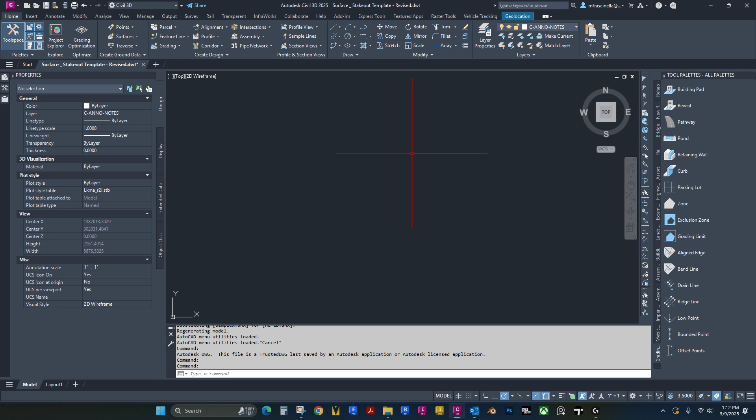Once it's open, we're going to do a save as, and we're going to save this as a drawing in our project. We'll just call it foundation and curb stakeout, and save.

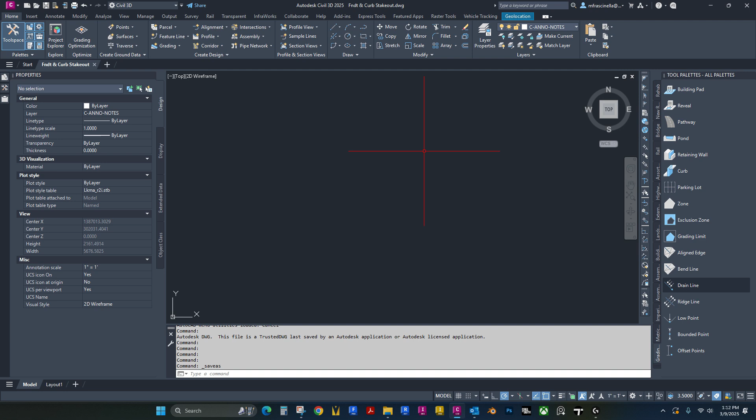The first thing we want to do is XREF our proposed layouts for what we're going to be staking out. So we're going to go to our XREF manager, hit the DWG, and go ahead and insert our layout.

Here's our building up here and our parking lot just below. Again, very simple, just a good thing for practice.

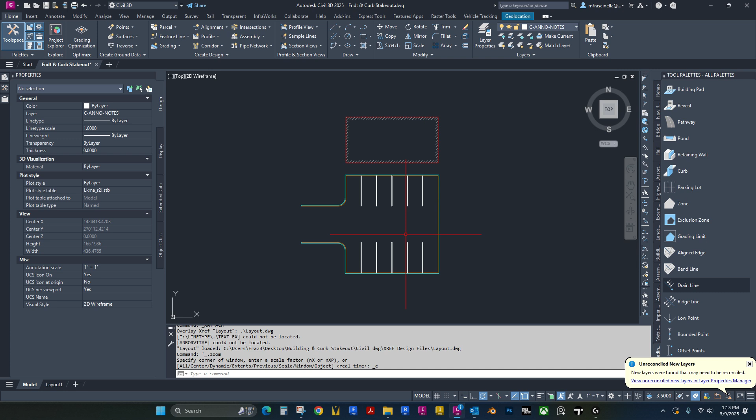Now that we have the layout in, the next thing we're going to do is put our surface in here. For the surface, we're not going to XREF it, we're going to data shortcut it. So we're going to go over to the Tool Space Manager, go down to where it says Data Shortcuts, expand surfaces, then right-click on Finished Grade, and select Create Reference.

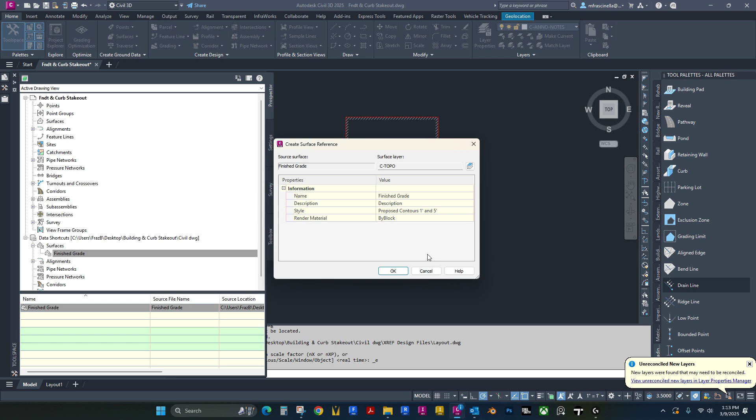And we're going to select the proposed contours 1 and 5 style, and hit OK. So now we have our surface in here, and we have our layout, so now we are ready to prepare the stakeout.

The first thing we're going to stake out is the building foundation. Since we'll assume that it has a full foundation, we're going to do a 15-foot offset. If this was a slab on grade, we could probably do more like a 10-foot offset, but for the sake of the example, we're going to do a 15-foot offset.

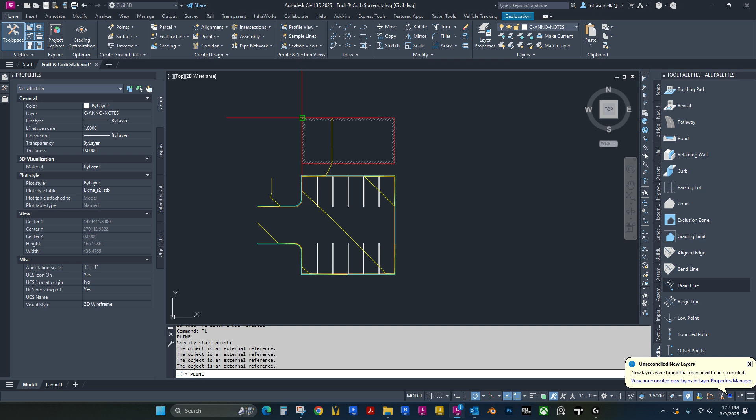The first thing I want to do is draw a polyline on each side of the building. So we'll go on the top, the side, bottom, and the other side.

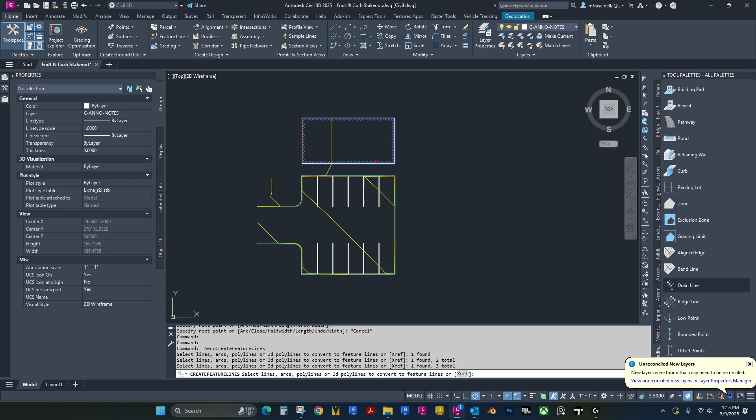Once we have the polylines around the building done, we're going to turn these into feature lines. To do that, we're going to go up in the top ribbon, click the drop down on feature line, and select create feature lines from objects. Then we're going to select the 4 polylines that we just drew, and right click.

We're going to keep it in site 1, that's fine. We'll put it on layer C-TOPO-FEAT, and then we're going to assign elevations and erase the existing entities.

Hit OK. Now we're going to get our elevations from the surface that we data shortcutted in, which is finished grade. We don't want to insert intermediate grade breakpoints — that inserts a point along the feature line anywhere there's a change in elevation, but all we want is a point at each corner. So we're going to turn that off, and then click OK.

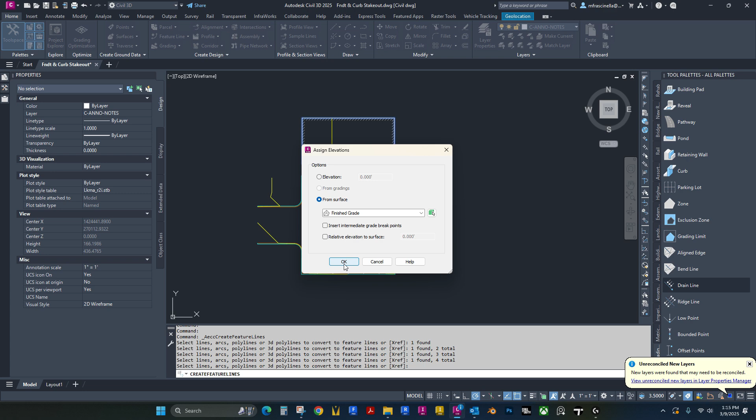Okay, so now you can see that these are feature lines with elevations. What we're going to want to do with each one of these lines is offset it the distance that we're going to be using for our stakeout, which in this example is 15 feet.

So we're going to select the feature line, go over into the ribbon where the edit geometry is, and use a command called stepped offset. Go ahead and click that. It's going to ask for the distance, so we'll go 15 feet. The side of the offset is going to be on the outside — we always want to offset the points on the outside of the foundation.

Elevation difference is going to be 0, because we want it to be the same elevation that we're going to be staking out. Then we're going to offset the other 3 walls the same exact way.

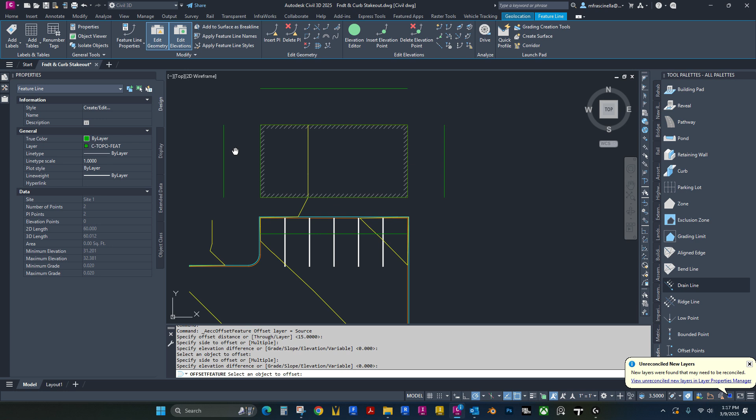Whoops, that didn't work, let's do that one more time. So we're going to select the feature line and do a stepped offset 15 feet to this side, and we'll offset this one to this side and enter. Okay, so now we have our 4 walls offset at 15 feet.

The next thing I want to do is create the points. So we're going to go up to the ribbon, and where it says point, we're going to hit that down arrow, and open up the point creation tools.

Go ahead and hit this down arrow, and that will expand the available options. So for the layer, we're just going to put this on V node.

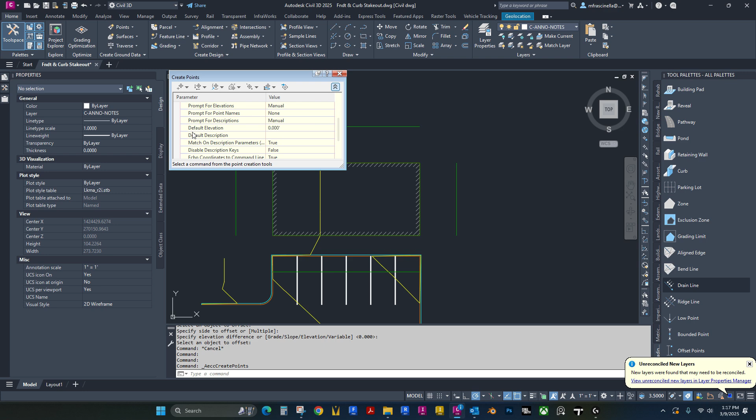Now, sometimes this won't expand all the way. You could hit the up arrow and then the down arrow again, and just drag it down. There we go.

All right, so let's go through the options. The elevations we're going to set to automatic, because we're actually going to be grabbing the elevation from the feature line itself. If you wanted to enter these manually for any reason, you can by selecting manual. But we're going to go for automatic because our feature line does have the elevation we want.

And the descriptions, we're also going to set that to automatic. And right here is where we want to enter our description. For this, we're going to do a 15-foot O period S period for offset. So now anytime we add a point and we have the description set to automatic, it's going to grab this default description, making it a little bit faster.

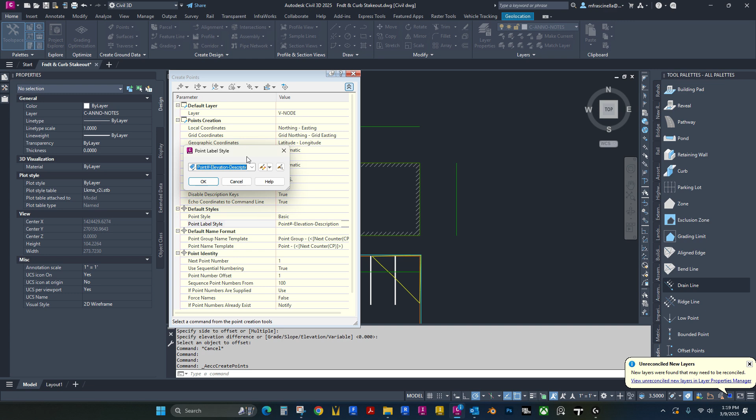For disable description keys, we're going to change that to true. By changing it to true, that enables us to change the point label style. So the style I'm going to be using is point number, elevation, description, dragged, because typically when I do a stakeout plan, unless it's a grid, I'm going to want to drag these points outward and move them around so they can display properly in my stakeout plan. Then once you have that selected, you're going to go ahead and click OK.

Okay, so the next thing we want to do is go through the point identities. So in order to not have any conflicts with existing survey points that may be inside the project already, I like to start my points from 10,000. So sequence numbers from 10,000. And then up here, next point number, that'll make sure that the first number we have out there is 10,000, and then it'll sequence the points from that number offset by 1. So it'll be 10,001, 10,002, and so on.

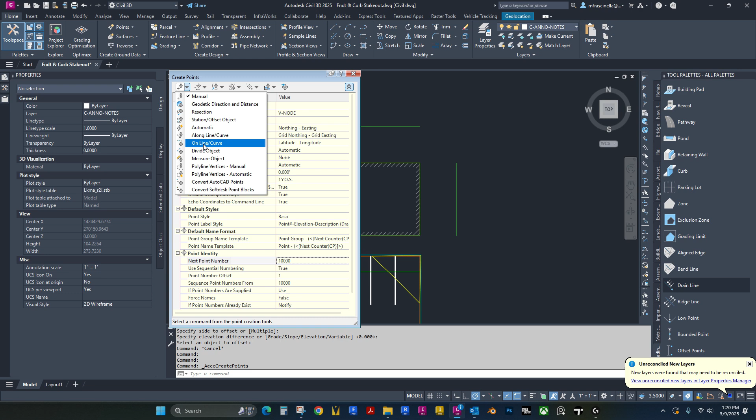Okay, so now that we have that all set up, we're going to hit this drop-down arrow, set our points, and do it on line/curve. Go ahead and click that. Now it's asking us to select an arc, line, polyline, lot line, or feature line. So we're going to select the feature lines that we just created, starting with the first one, select it, and then select the next one, the next one, and the next one.

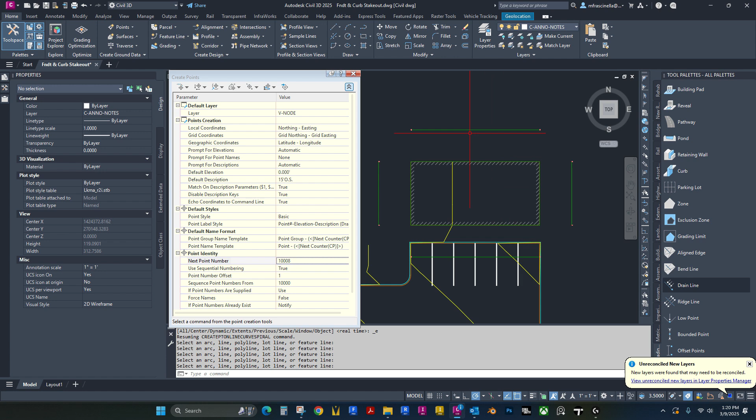Right click. All right, so the points are very small because we haven't changed our scale on the bottom. For this kind of drawing, probably a 10 scale would be fine, but you would really want to set it to whatever scale your drawing is going to be at. That's what you'd want to set these to. This way, when you move them around and drag them, you know how they'll display once you XREF it into your drawing. So you could see here, it did grab the elevation from the feature line.

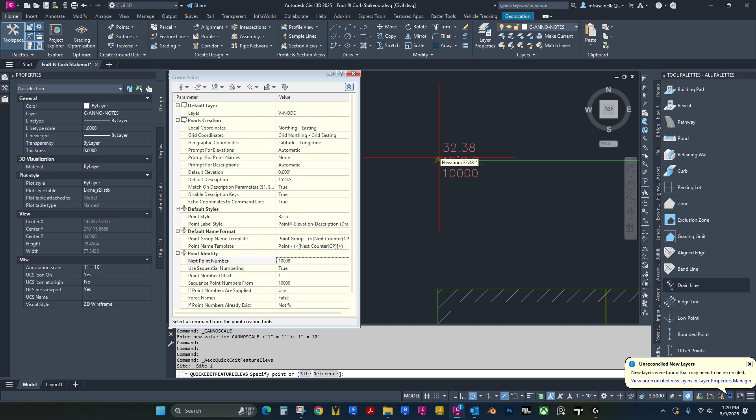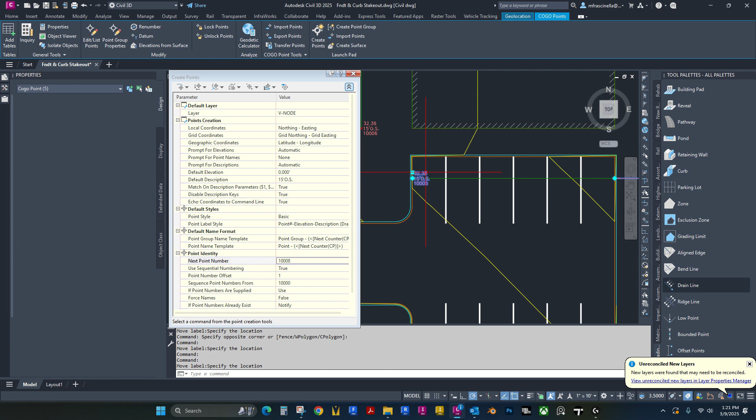We could double check that by just doing a quick elevation edit on the feature line. You can see right here, 32.381, and that's what we have on our point. So it's just a quick little check to make sure your points were reading right. And then we can drag this up, and we're going to go ahead and drag the other ones out of the way. You could also see that the numbers go by, increasing by 1 each time, which means it did everything correctly.

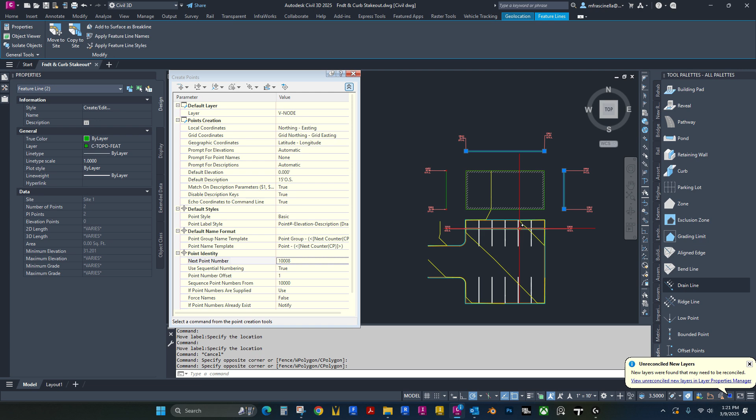Okay, so now that we have those points, we could go ahead and delete these feature lines because we no longer need them. And something else I like to do is add an arrow that points from the point to the corner in which it's staked out, or the feature it's staked out for. To do that, we're going to go up to the top menu, go to Insert, and we're going to insert the Stakeout arrow block.

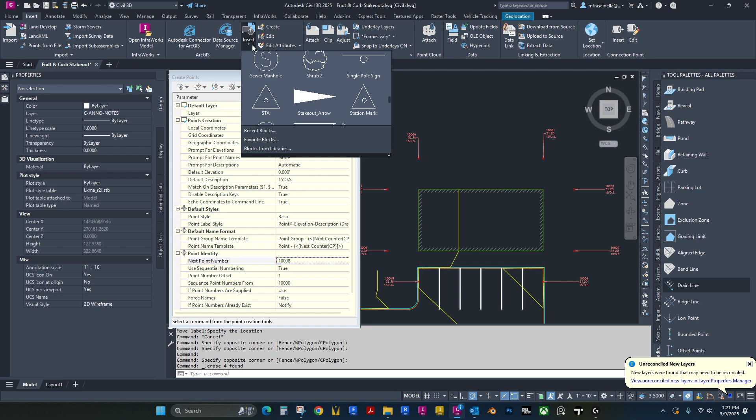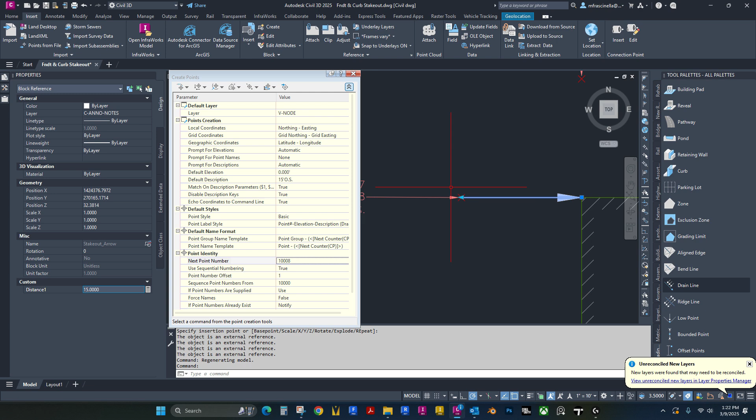So we're going to put this right at the corner. I just like to zoom in and make sure that it's actually snapped to the corner, which it is. And we can select this Stakeout arrow, and in the properties, the distance, I'm going to set this to 15. So that extends the arrow right to where our point is.

Perfect. Then I want to put this to each other point. So we'll go to Home and use the mirror command to mirror these around the foundation. Then we'll copy this, give it a rotation of 90 degrees, and move it to the corner.

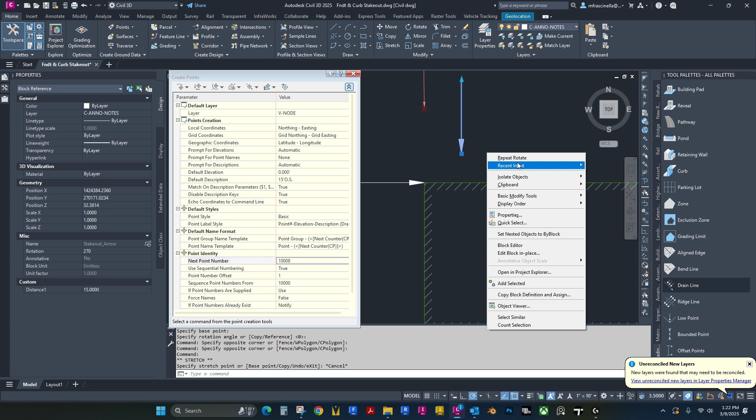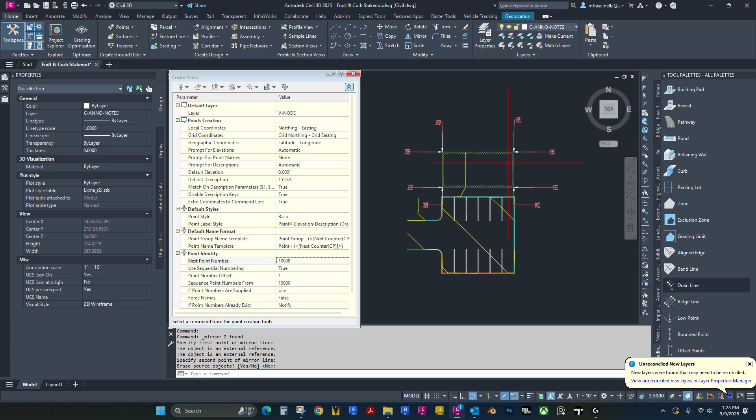Just like that, and we'll do the same thing with this one. We'll mirror it. Mirror these two. All right, perfect. So right there, that's the foundation all staked out. We have 4 corners, and that's now done.

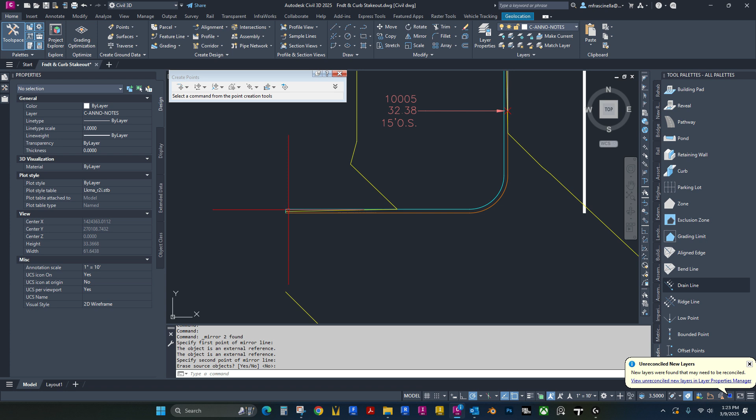The next thing we want to do is move on to the parking lot. For the parking lot stakeout, what we typically do is stake out the face of curb with the top of curb elevation. So to grab my top of curb elevation, I'm going to trace over the cyan colored line, which is the back of curb and will have my top of curb elevation. So I'm going to draw a polyline.

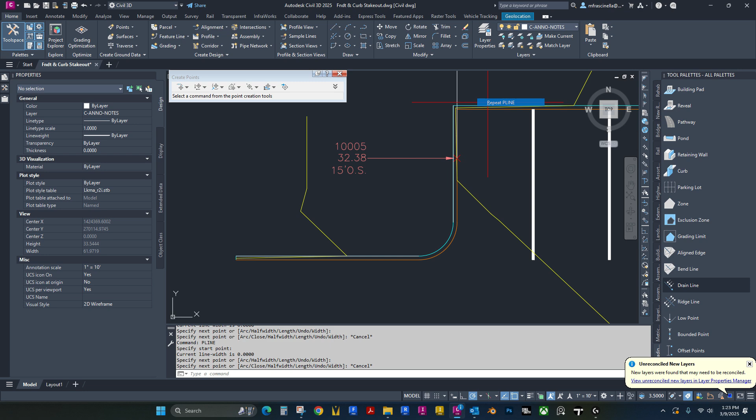There it is. I'm going to skip the radius. The reason I'm doing each segment separately is so we can get 2 points for each corner, because that's how you stake out a corner - with 2 90-degree points.

Okay, so these are fairly short runs we have. It's a small parking lot. If you had a longer run, you could add some points here. So what I'll do as an example is go to this and add a vertex at the midpoints of each of these curb lines.

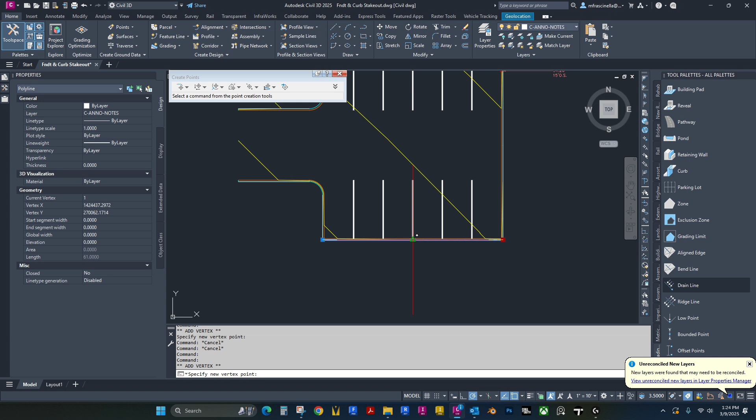The reason I'm doing this is because when we go to add the points to our feature line, it'll automatically have a vertex at this point, and it'll add a point without us having to do anything. So it just makes it a little bit easier for us to get our points.

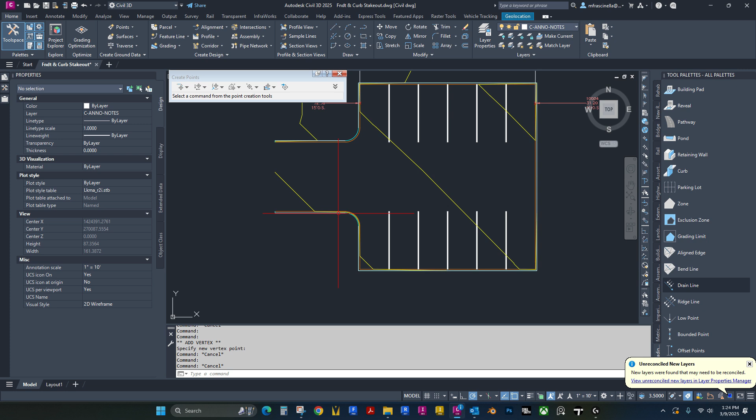Okay, so now that we have all our curb lines delineated with a polyline, we are going to again go up to the feature line in the ribbon, hit the down arrow, and create feature lines from objects. Once we select that, we're going to go around and select each polyline that we just drew.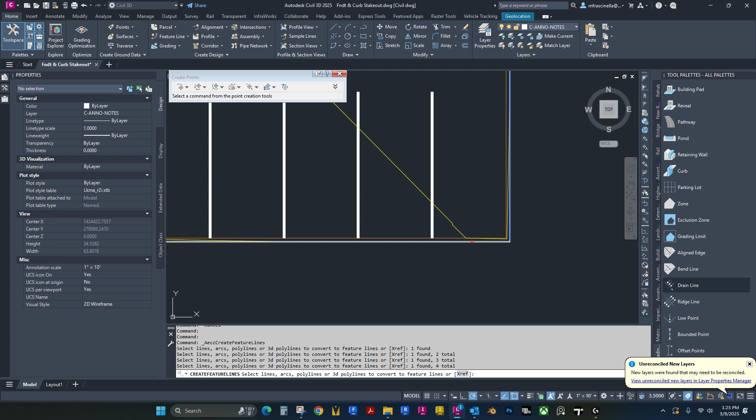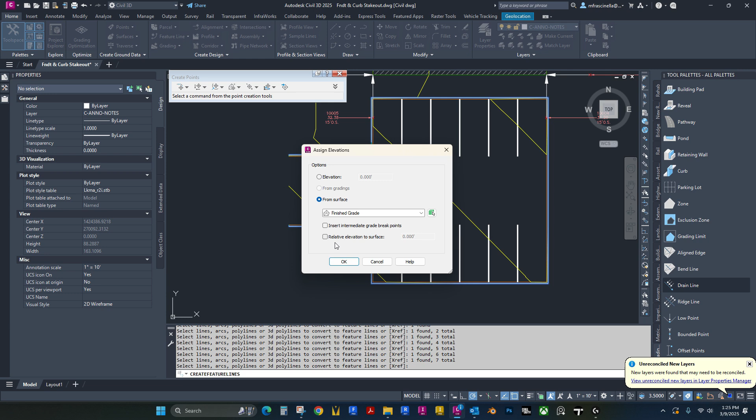Okay, once they're all selected, we can right click and hit enter. Keep it in site 1. Layers fine. Okay, and we want to do elevations from surface again, and we only want an elevation at each vertex that we set, which we did. We don't want to check insert intermediate grade breakpoints or relative elevation surface. Once you have that done, you can click OK.

And there's our feature lines. Again, you could go into the properties, just double check that it does have elevations and that it grabbed them, which it looks like these did.

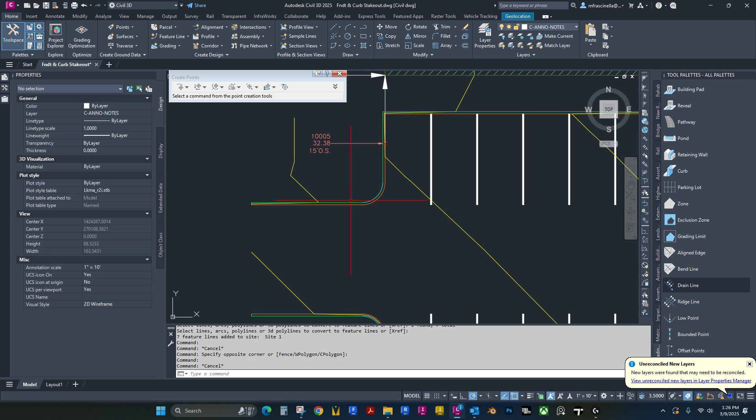So for curb, what we do is a 5-foot offset from face of curb with the top of curb elevation. Now for these feature lines, we're going to offset them 4.5 feet because we have a 6-inch thick curb. So we're going to do a stepped offset again - select the feature line and then go up to the top ribbon in the edit geometry section and click stepped offset.

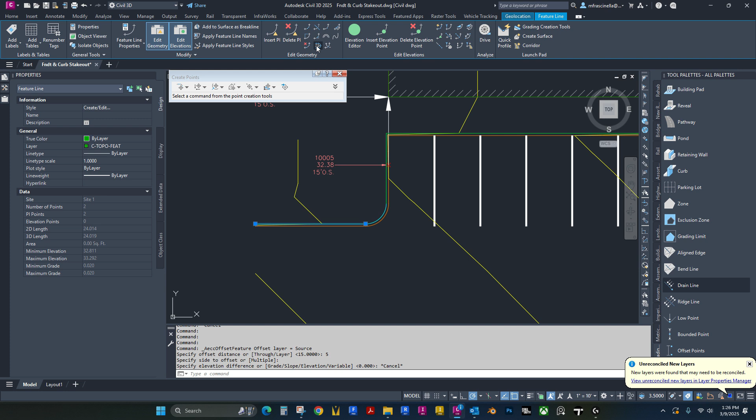For the distance, we're going to go 5 feet this time for the curb, and we're going to offset to the backside. Oops, I'm sorry, we should have offset that 4.5 feet. So let's do that again. Stepped offset 4.5 feet to this side. Elevation difference is 0. And we're going to do that to all the other feature lines that we created.

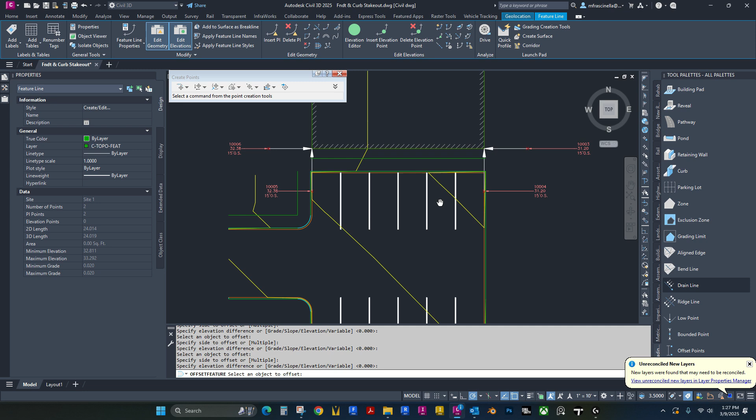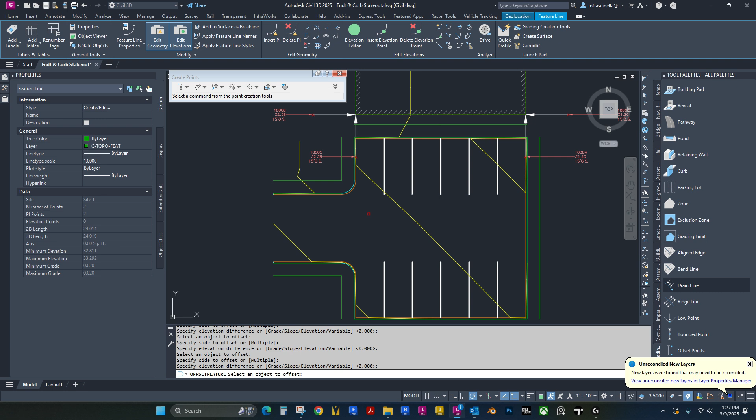Okay, so now we have our feature lines offset by 5 feet. So what we want to do now is add the points to these feature lines. We're going to hit our down arrow under the Create Points menu. Again, if for some reason you closed out of this menu, you just go right up to the ribbon, hit the drop down arrow under Points and Point Creation Tools.

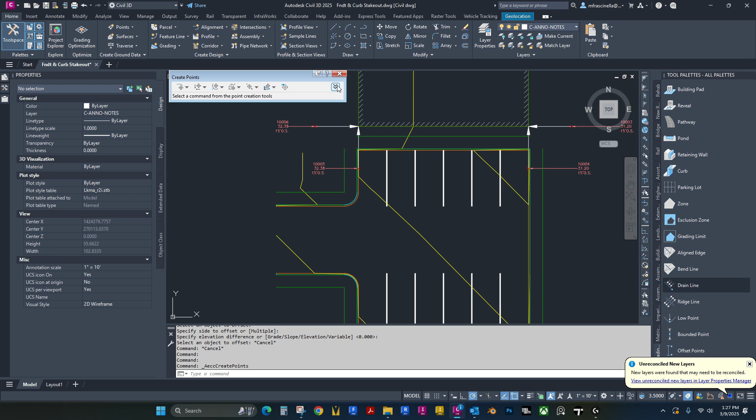Then we're going to expand this menu by clicking the down arrow, and all of our other settings will be held. You'll notice that the point identity, the next point number, will just follow along with where we left off, so you don't have to change anything here for the next group of points. But one thing we do want to change is to set this to 5 foot and then O period S period for offset, because now we're offsetting 5 feet for the curb instead of 15 for the foundation.

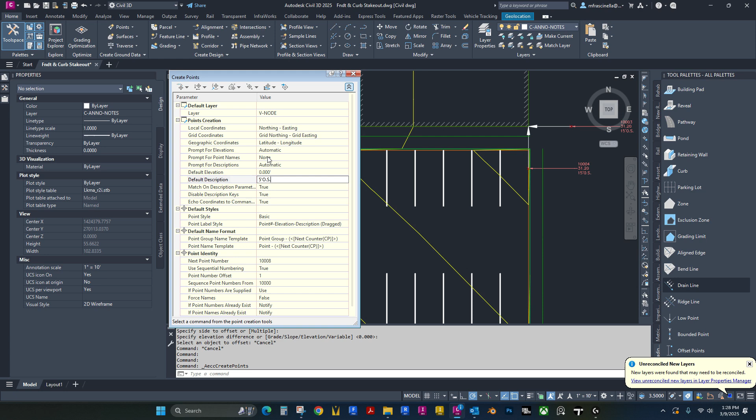Once this is done, we can go ahead and do the same command, which is add points on line/curve. We'll select this feature line, and just keep going around the parking lot. I like to go in a clockwise motion.

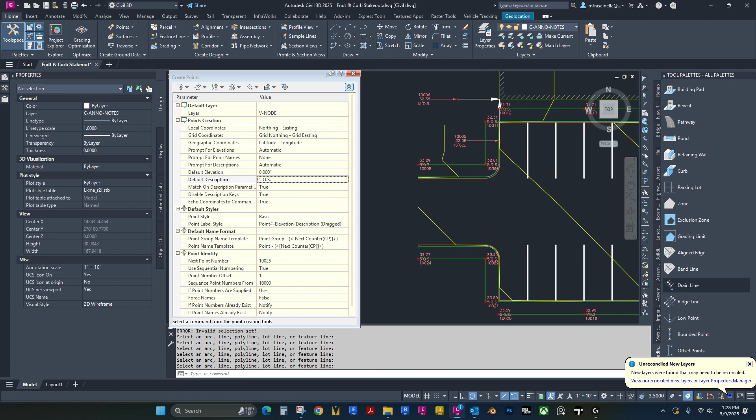Okay, so now we have all our 5 foot offset points for the curb. And what I would like to do now is take these arrows - we'll just copy one from the corner and move it down to here. And now this time instead, we're going to be doing a 5 foot. So we tweak that, sorry. Move it to this corner, face of curb.

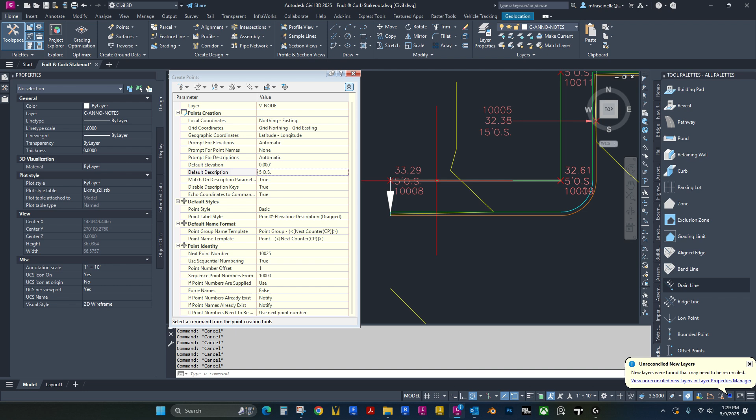Okay, good now. We'll move it to the face of curb. And now you'll see that the 5 foot offset meets perfectly with our points.

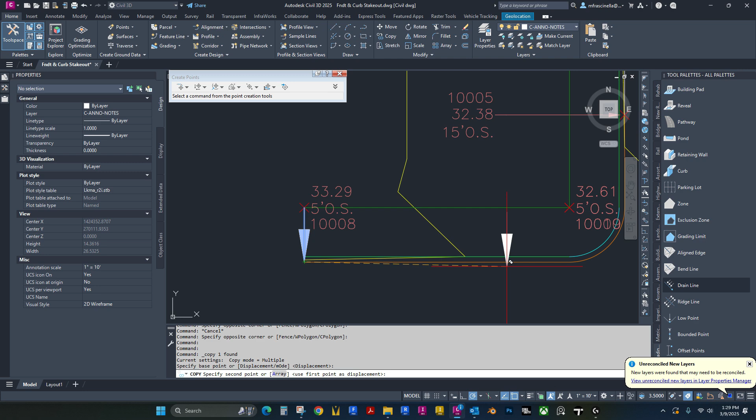So we're going to copy this corner, this one. Now you'll see that we do have a midpoint point because we added that vertice when we made the polyline. So now we want to add here. Okay, go down here. We'll rotate this 180 degrees

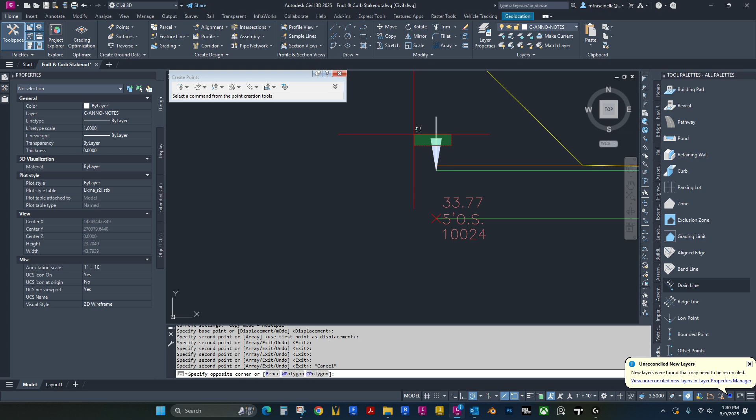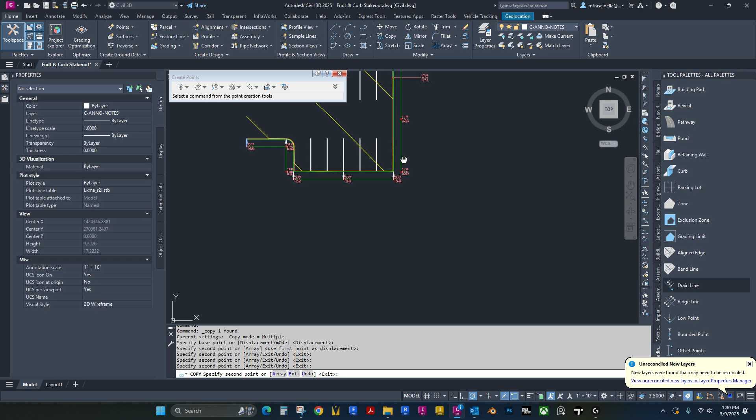And move it to the face of curb. And we're just going to copy this, each of our points. And then we'll rotate this one 90 degrees.

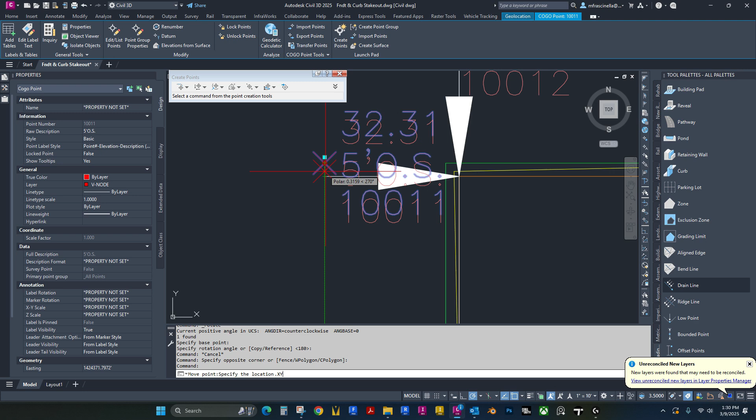Now, one thing we will have to do is just move this point. And to move it without messing up the elevation, after you hit the move command, you type .xy, select the location of the point, and then we go back to here for the elevation. Now you see that this elevation held at 32.31 and matches the other point for this corner.

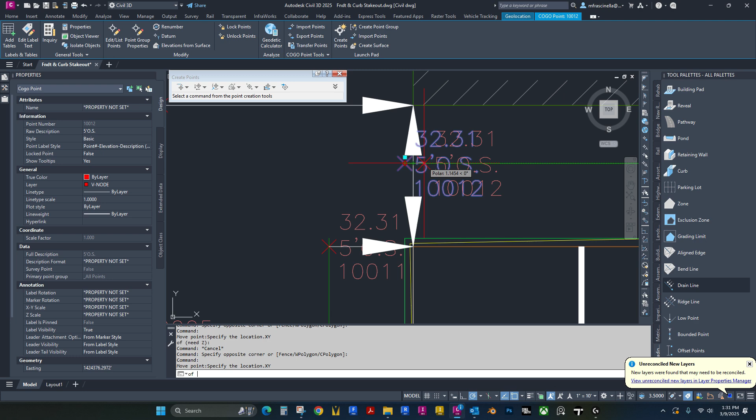We'll do the same thing for here. So we're going to go ahead and click the point to move it, and we're going to hit .xy. And we're going to go to right here with an elevation from here. And there we go.

Now we're going to take this arrow and we'll mirror it to the other side of the parking lot. Enter. Make sure, yep, it's in the correct spot. And now at this corner, we'll do the same thing.

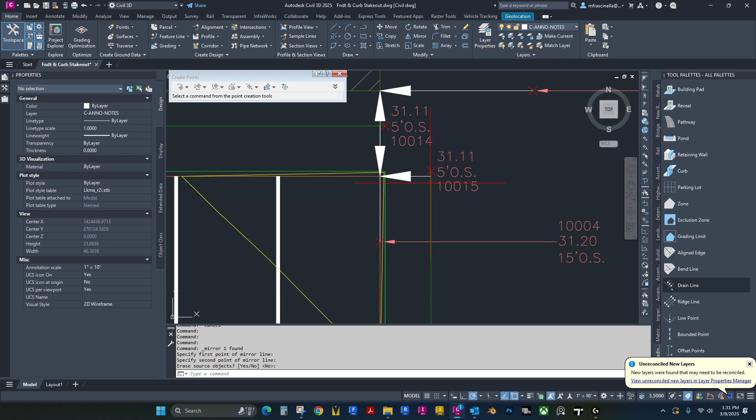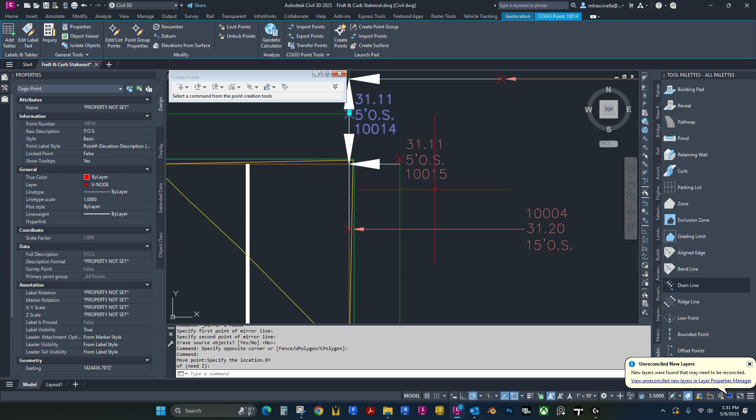So we're going to grab it from the grip, and we're going to do a move with .xy, move it to here with the elevation from the original spot. And you could again see that our elevation matches, so the elevation held. Same thing with this one.

We're going to copy this arrow down to this corner. We'll move this arrow here. And we'll move this point again.

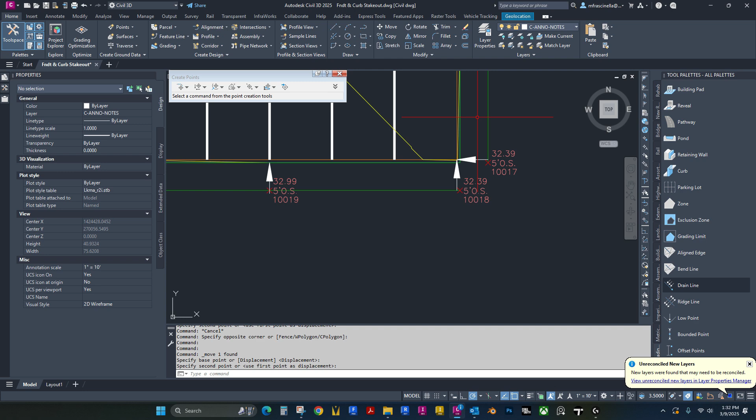Again, just grab it from the grip. Type .xy. Select the new location and then the old location for the elevation. Same thing for this point.

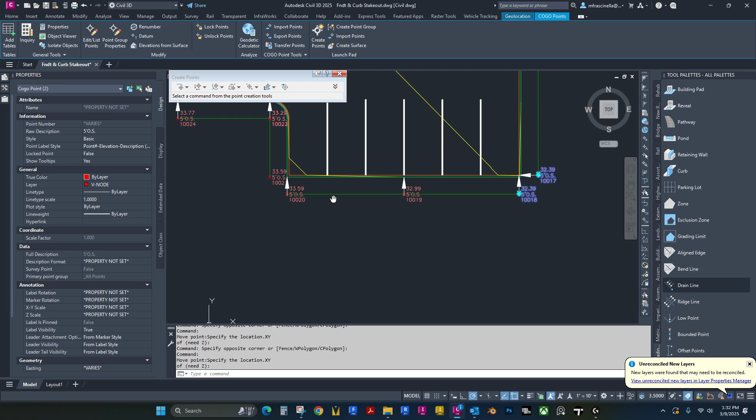Good. So we'll take this arrow. We're going to mirror it now to the other side of the parking lot. Hit enter. I'm going to move this arrow to here. Perfect. And then we'll move the point again.

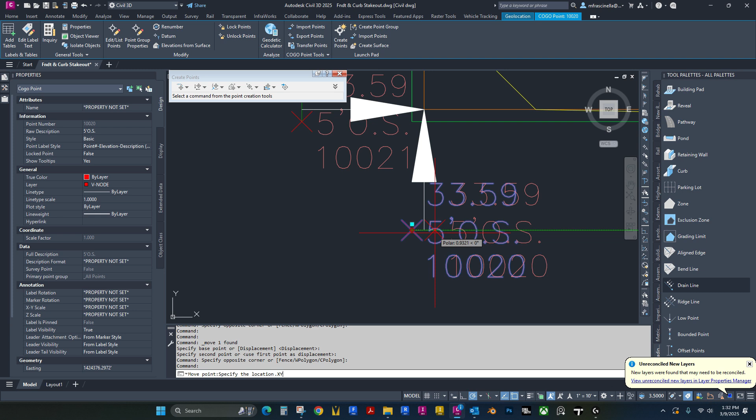Just take the grip, type .xy, new location, and then the old location for the elevation. Do it up here.

And then we're going to copy this arrow and just move it up to here.

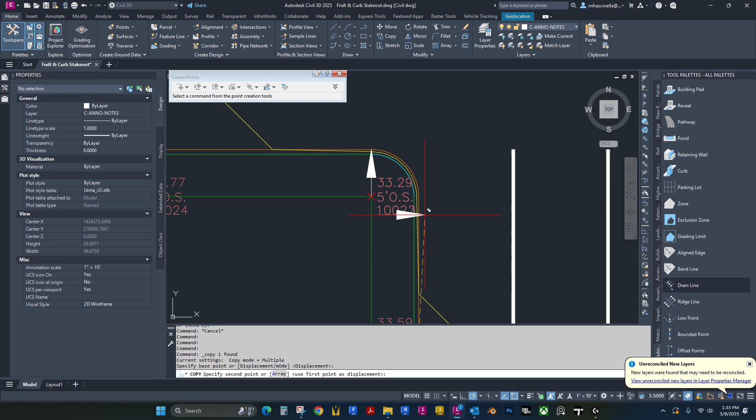Okay, so now we are done with these feature lines. We could go ahead and select them and then just delete them out of the drawing. Perfect. All right, so now we just want to drag our points away from the arrow again.

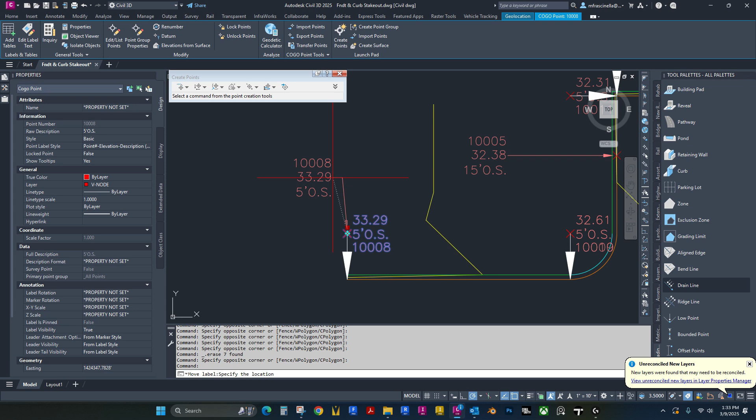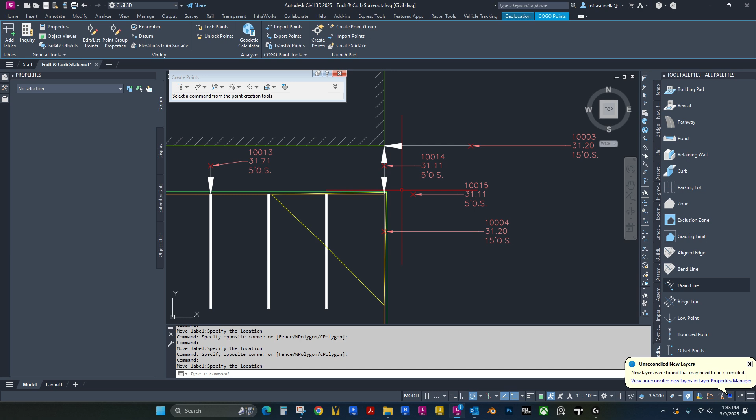I just realized I deleted the arrow here, so I'm going to copy this one up. Paste it. And I missed an arrow down here. There we go.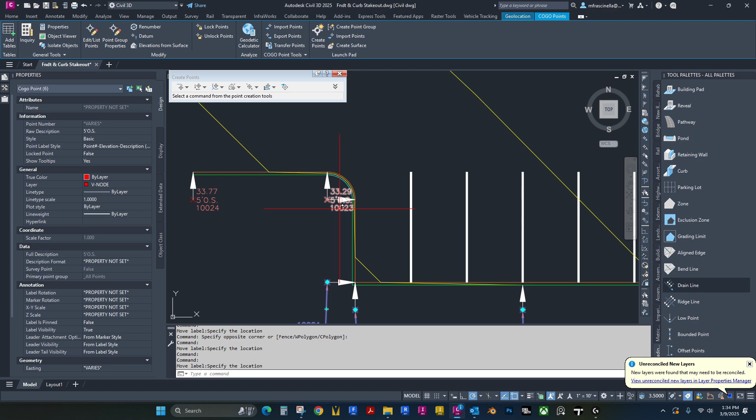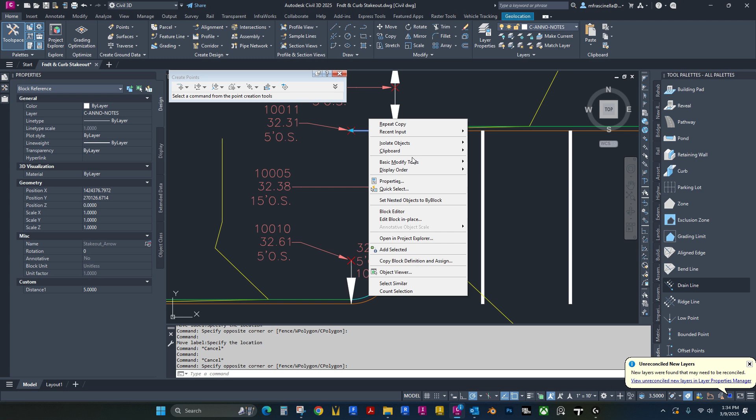Okay, so the last thing that we are going to have to do, oh, just missed another arrow, hold on. So we're going to copy this one, and we're just going to go ahead and copy it to here. Okay.

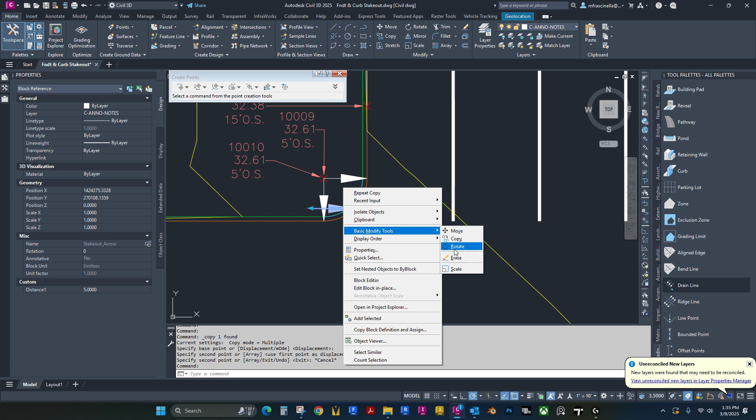Okay, so the other thing that we want to stake out now is we have two radiuses, one here and one here. So we're going to take another arrow, we're going to copy it, and then we're going to rotate this 45 degrees.

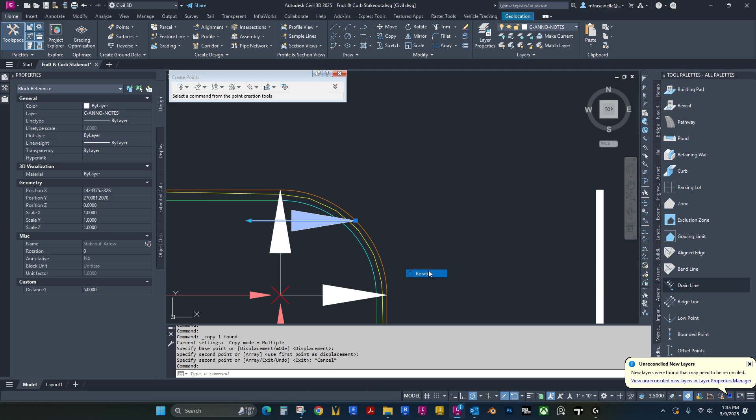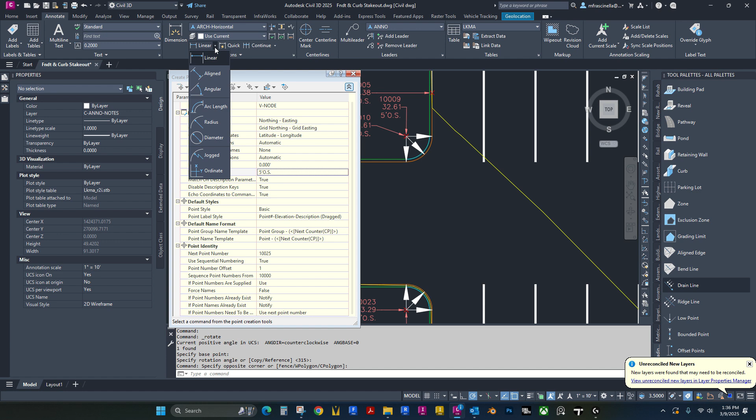Okay, now we want to add two radius points here and here. So what I'm going to do is, instead of having a description say 5 foot offset, I want to get the radius of this. So let's see what there is the radius of this curb.

So it's a 5 foot radius. So we're going to change this description to R equals 5 feet. And now we're going to do random points on the surface.

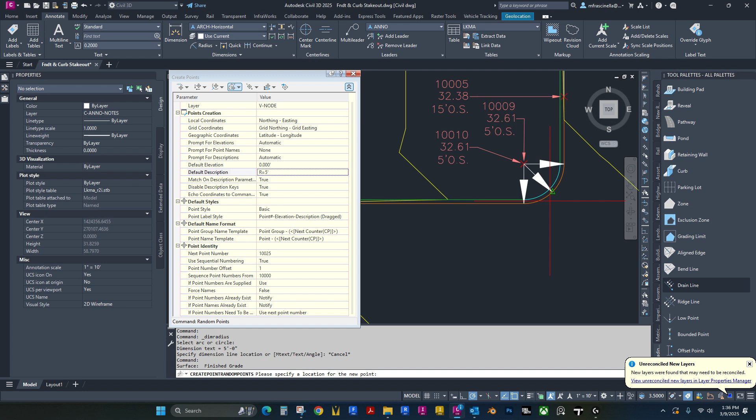And we're going to select one here and select one, oops, sorry, backside of curb. And now, since we did face of curb on this one, we got to move it to the back side.

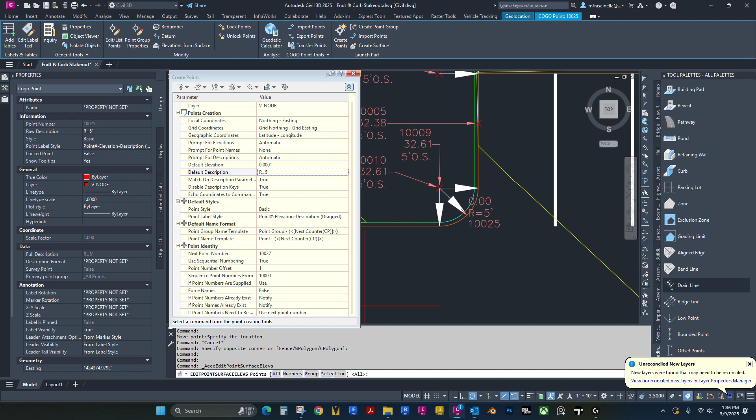And since the elevation went to 0, what we're going to do is we're just going to select the point, and then we're going to go up to our ribbon and select elevations from surface. And then we're going to select selection. And there we go. Now our point has the correct elevation.

So we're going to move this the same way we did the other points. Type in .xy, select the new location, and then the old location for the elevation. There we go.

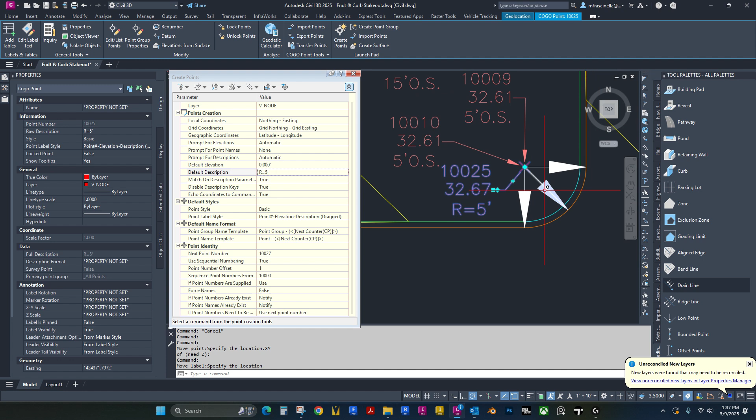And we're going to do the same thing down here. .xy, new point location, old point elevation. Just move this around so it's a little more legible. I'm going to drag this up.

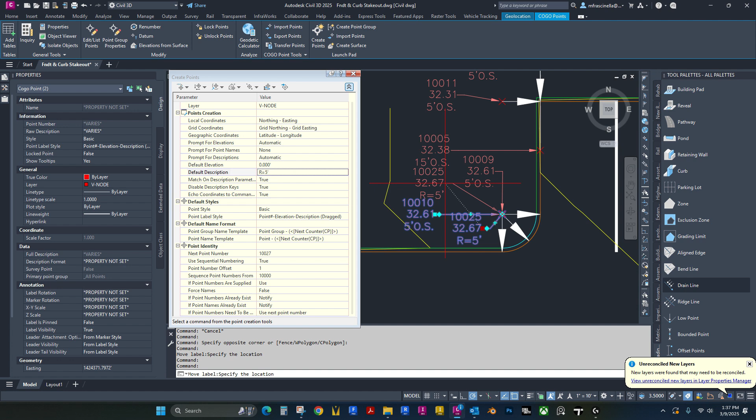Okay, so there you have it. That is all the stakeout points we need to lay out both the building and the parking lot. And that's it. That's simple and easy.